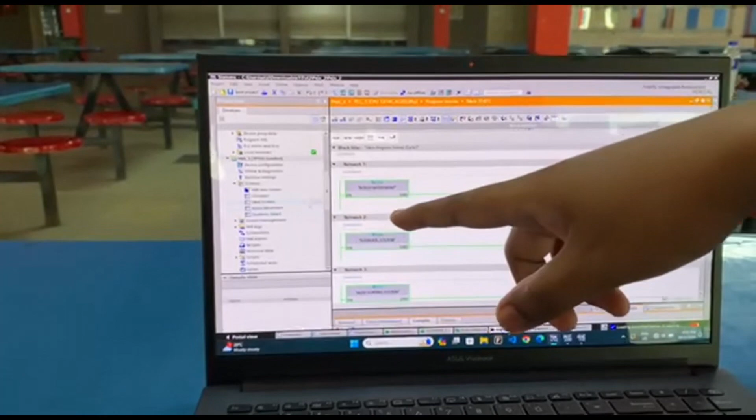As you can see here, for our coding in PLC, our program block consists of auto sorting system, counter system, robot movement, and for our HMI we got our main screen, conveyor, robot movement, and student detail. So for our function program in PLC, I will pass to Azizi.

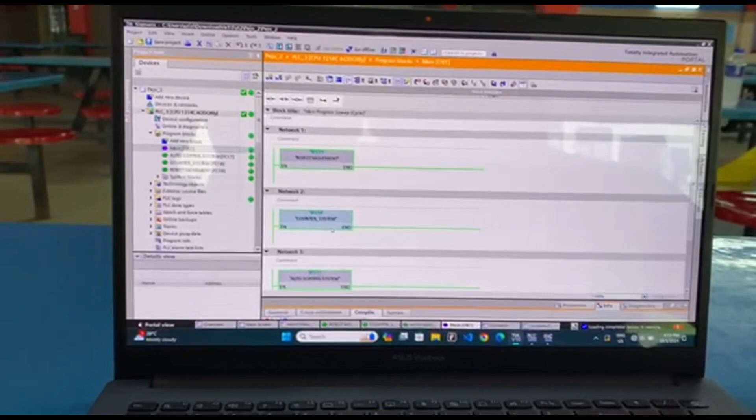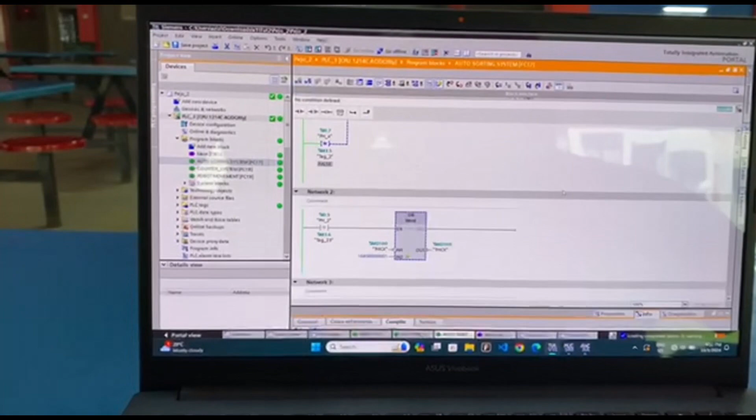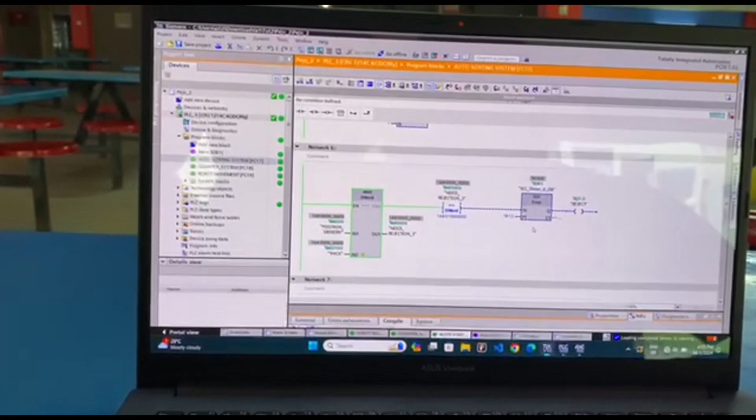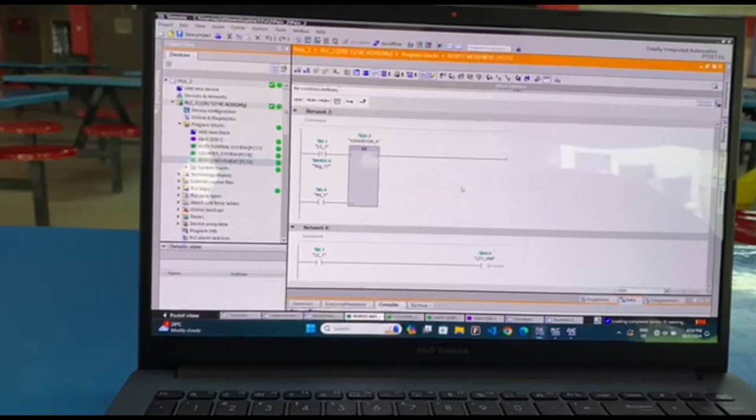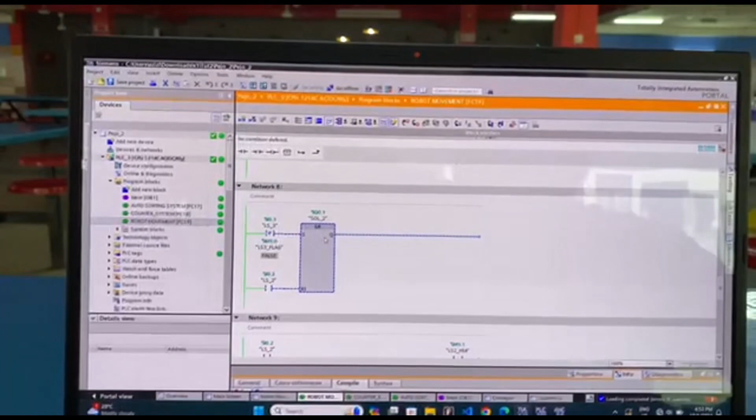And then for the robot movement, when LS1 is pressed, conveyor A will open, and then PH1 also, the gripper will open and will stop when LS3 is pressed. And then this is solenoid 2, same goes, if LS3 is pressed, solenoid 2 will open and stop when LS2 is pressed.

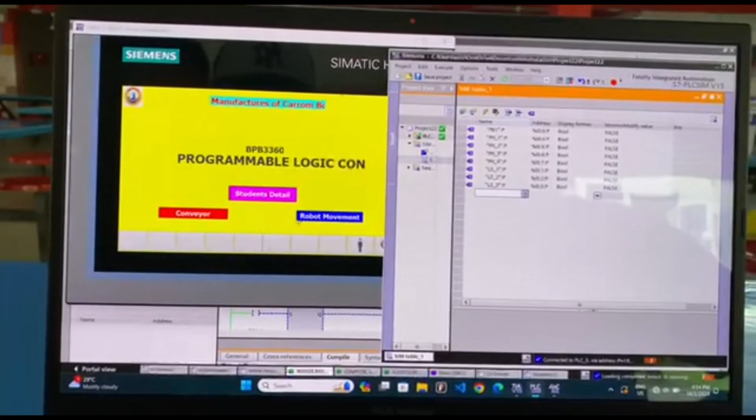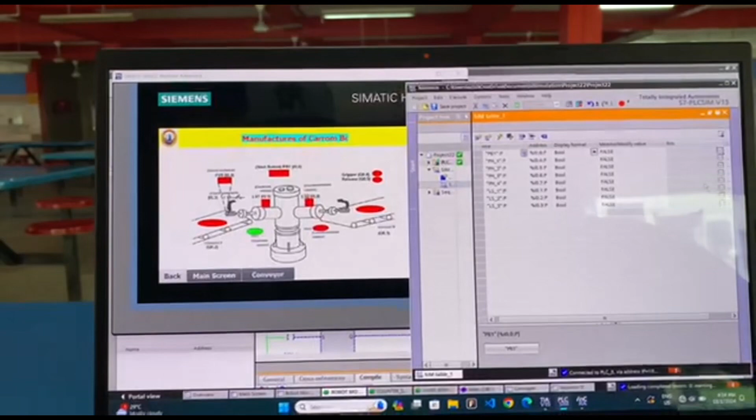So we jump to the HMI for the simulation. Okay, so as we can see here, we go for the robot movement first. When we press the push button, the solenoid will turn on, and then when we push the start button once, and when limit switch 1 detects, conveyor A will operate.

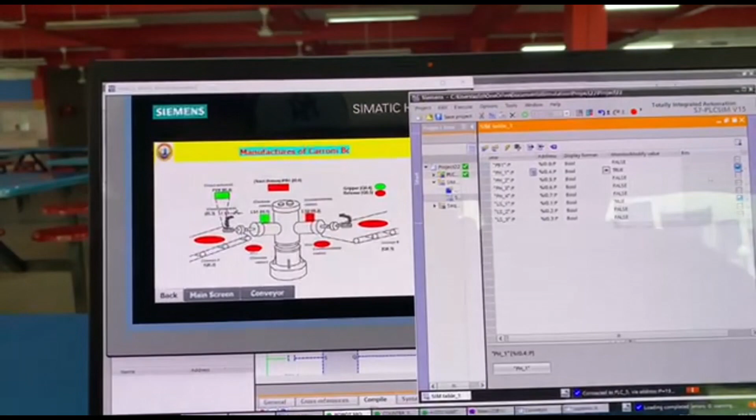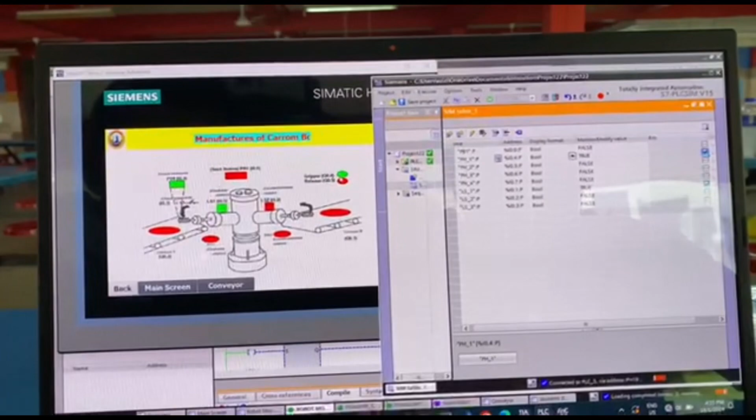After LS1 detects, the PH1 sensor will operate. As we can see, LS1 is operating. Then after PH1 detects the workpiece, conveyor A will stop, and then the gripper will turn on. As we can see in the HMI, the gripper is on, PH1 is on, LS1 is on.

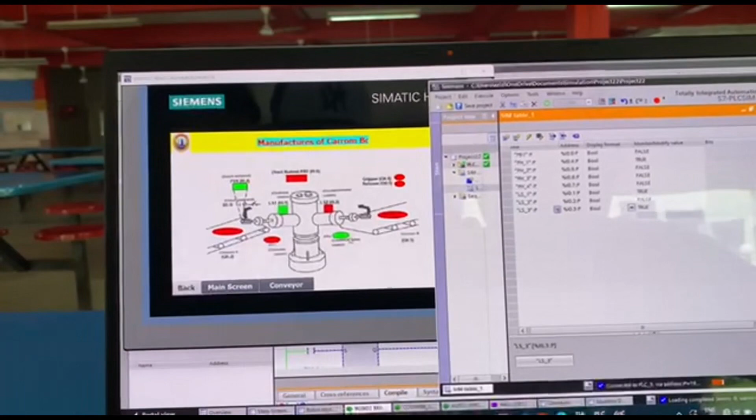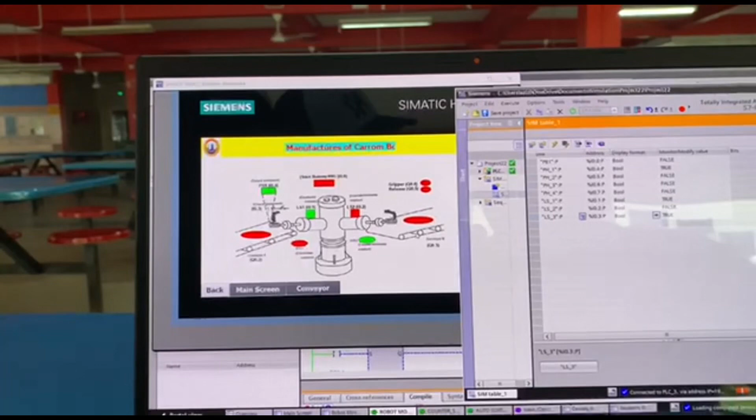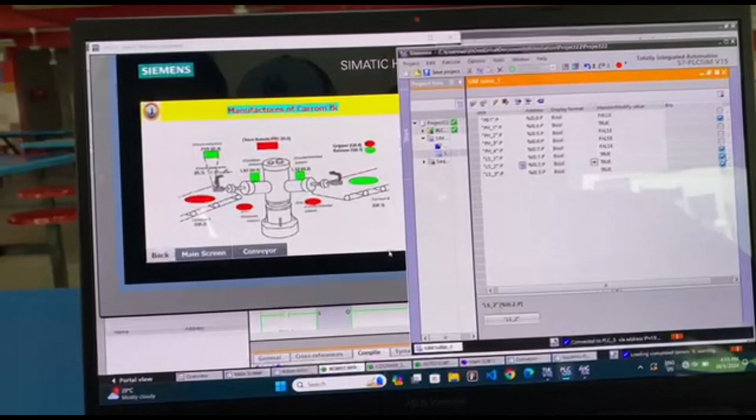And then to confirm the grab, sensor LS3 will operate. As we can see, solenoid 2 will rotate counterclockwise. And then when LS2 detects the arm, it will release the carom onto conveyor B. So conveyor B will turn on. So that's for the robot arm.

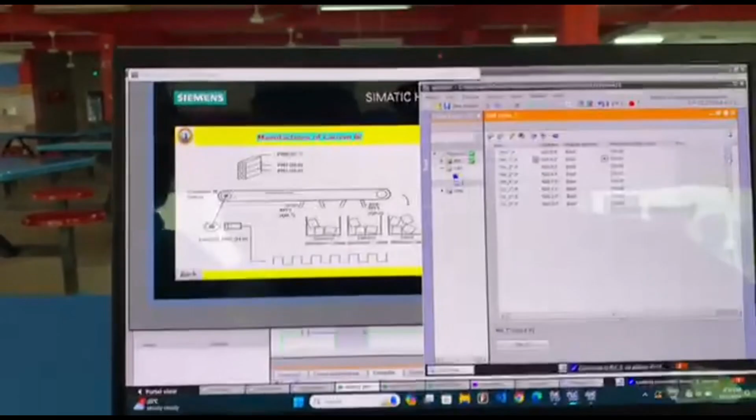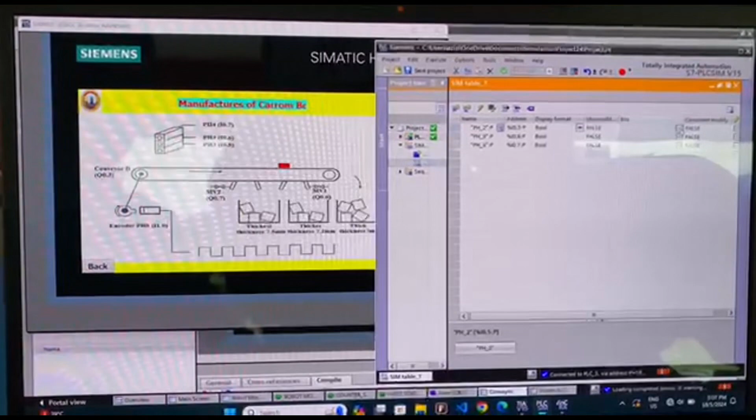So we go for the conveyor. Okay, alright, so now we are going to explain about the conveyor system. As you can see here, when PH2 detects, the Carrom will go for the thick. When PH3 detects, the Carrom will go for the thicker.

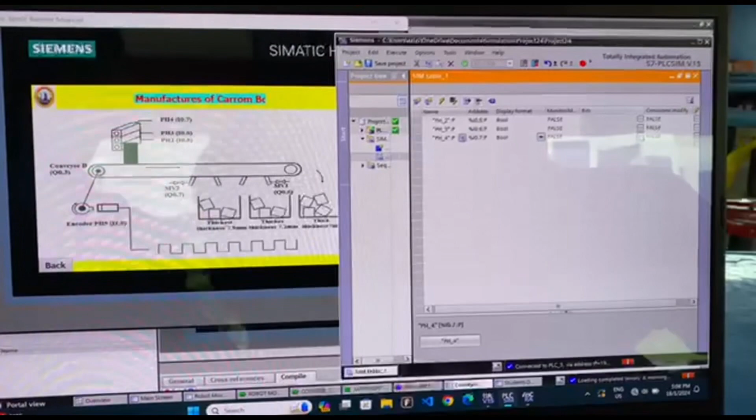And lastly, for PH4, when the sensor detects the Carrom, it will go for the thickest. And when this cycle completes 19 times, it will shut down.